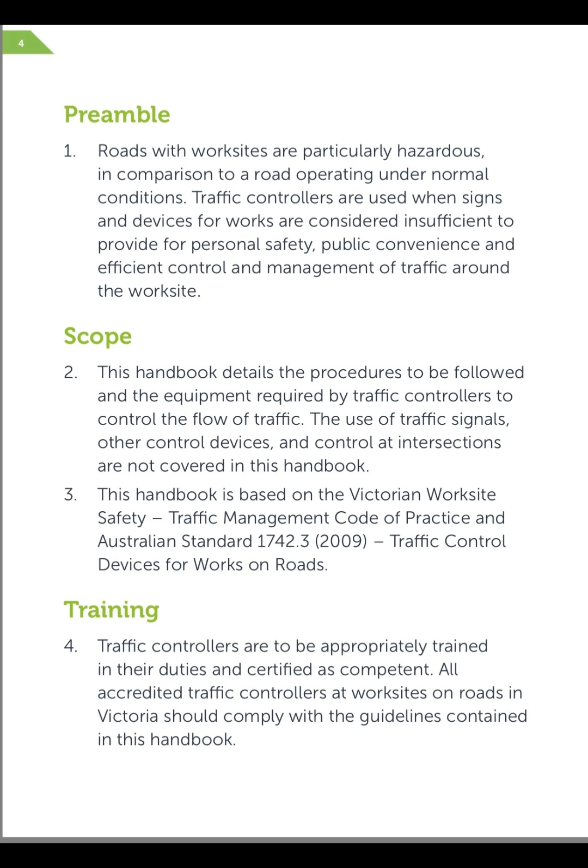Training. 4. Traffic controllers are to be appropriately trained in their duties and certified as competent. All accredited traffic controllers at work sites on roads in Victoria should comply with the guidelines contained in this handbook. 5. All traffic controllers are required to obtain a valid statement of attainment in traffic control using stop/slowbat and should attend an appropriate refresher course every 3 years.

Traffic Controllers Authority. 6. Accredited traffic controllers have the authority to: A. Legally stop or slow traffic using a stop/slowbat. B. Use hand signals to advise traffic in conjunction with the stop/slowbat. And C. Report to the supervisor motorists who fail to follow reasonable directions.

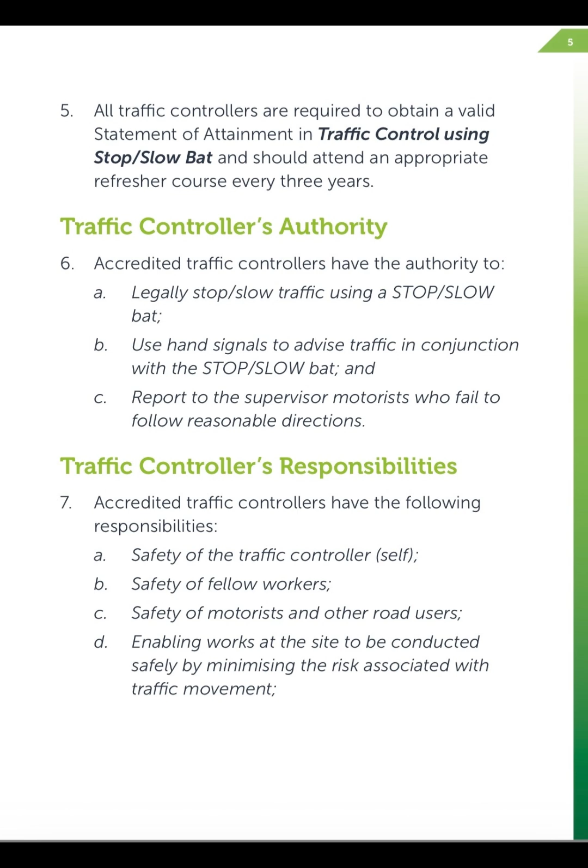Traffic controllers' responsibilities. 7. Accredited traffic controllers have the following responsibilities: A. Safety of the traffic controller self. B. Safety of fellow workers. C. Safety of motorists and other road users. D. Enabling works at the site to be conducted safely by minimizing the risk associated with traffic movement.

E. Controlling traffic in a professional manner to enable drivers to negotiate through, past, or around the worksite safely. F. Ensuring that indication given to the traffic is consistent with the display provided by the traffic signals. G. Maintaining traffic control in emergencies and other difficult situations. And H. Minimizing delays to traffic.

Application. 8. When required by the volume of traffic or the conditions at the worksite, the supervisor may arrange for traffic controllers to control the movement of traffic in the following situations: A. On bituminous surfacing works being carried out under traffic. B. Where one lane of a two-lane two-way road or bridge is closed unless traffic signal control is used. C. Where any of the conditions for the creation of worksite speed limits exist, but such speed limits are not being adhered to.

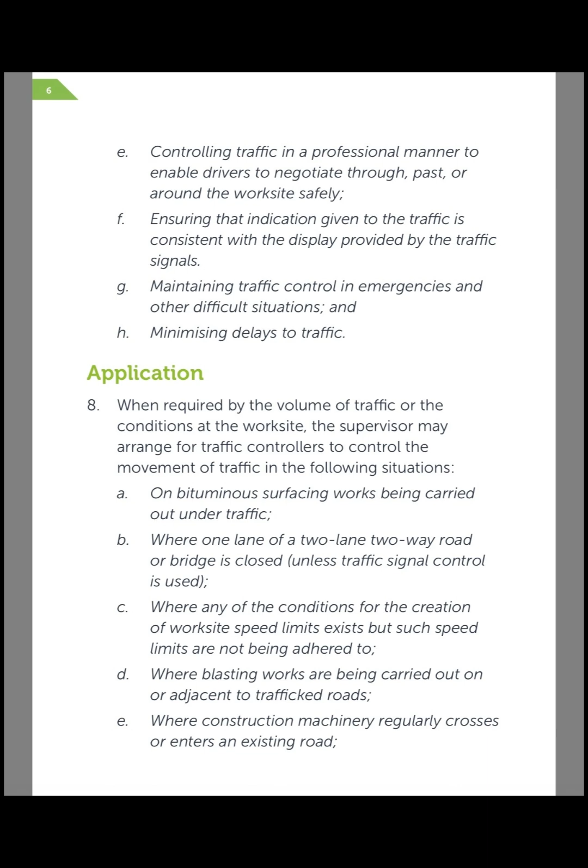D. Where blasting works are being carried out on or adjacent to trafficked roads. E. Where construction machinery regularly crosses or enters an existing road. F. Where sight distance to the worksite is limited. G. In emergencies. And H. Where signs and devices direct a motorist to disobey a law in any of the above circumstances.

9. When considering the volume of traffic, the following factors must be taken into account: A. Safety of the workers at the site. B. Safety of the public at the site. C. The duration of work. D. Site conditions and layout. And E. Personnel available. Dress. 10.

It is essential for safety that the traffic controller wears appropriate high visibility clothing at all times while on traffic controller duty. Such high visibility clothing is designed to make personnel more conspicuous and to warn road users of their presence. In daytime applications, a fluorescent red or orange high visibility garment complying with AS/NZS 4602 is required.

The garment should be correctly fastened at the front at all times and should be clean and in good condition. It should display information to identify the organization to which the controller belongs. A fluorescent red or orange cap or hat may also be worn, though it is not required.

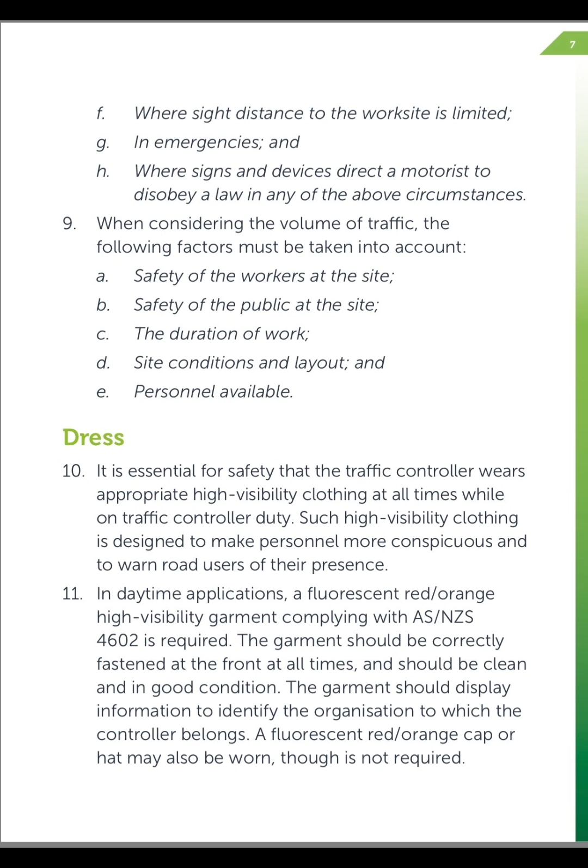Fluorescent material alone does not give adequate conspicuity for night use. A garment meeting or exceeding the requirement of AS/NZS 4602 for night use must be worn for night applications. High visibility garments are required to have an information tag which details whether they are suitable for day use, night use, or both day and night use.

Traffic controllers are advised to check the tag on their high visibility garment before use to ensure it is the correct type for the application. In wet conditions, the wearing of wet weather clothing should not obscure the high visibility garment requirements set out above. Safety footwear conforming to Australian standards should be worn at all times by traffic controllers.

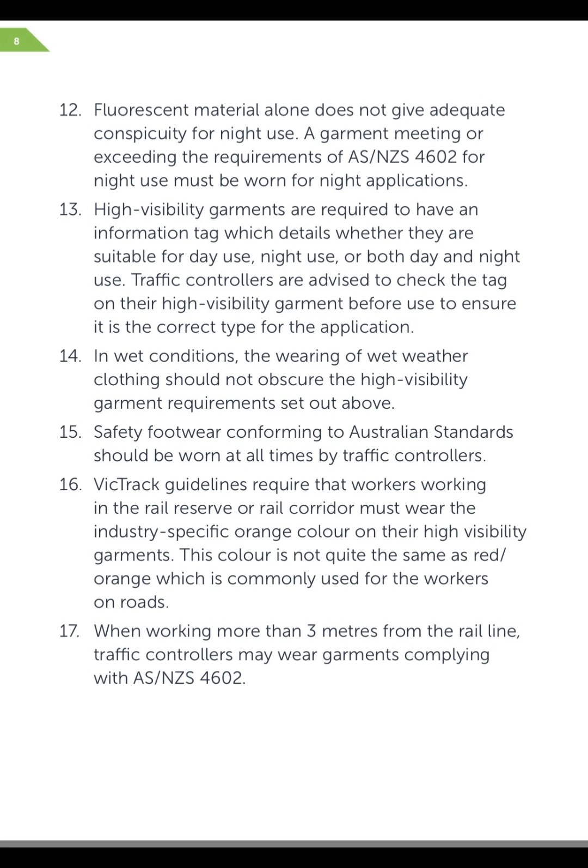VicTrack guidelines require that workers working the rail reserve or rail corridor must wear the industry-specific orange color on their high visibility garments. This color is not quite the same as red or orange, which is commonly used for workers on roads. When working more than 3 meters from a rail line, traffic controllers may wear garments complying with AS/NZS 4602.

Stop/slow bat. The stop/slow bat is a double-sided handheld sign with a stop banner, R6-8, on one side and a slow banner, T7-1, on the other. The banner size must be 450 or 600 millimeters in diameter.

The stop banner comprises a white Class 1 retroreflective legend and border with a red Class 1 retroreflective background. The slow banner has a black legend and border with a yellow Class 1 retroreflective background. The banner faces are shown below.

Traffic control bats should be clean and in good repair. Damaged or defaced banners or bats should be repaired or replaced promptly.

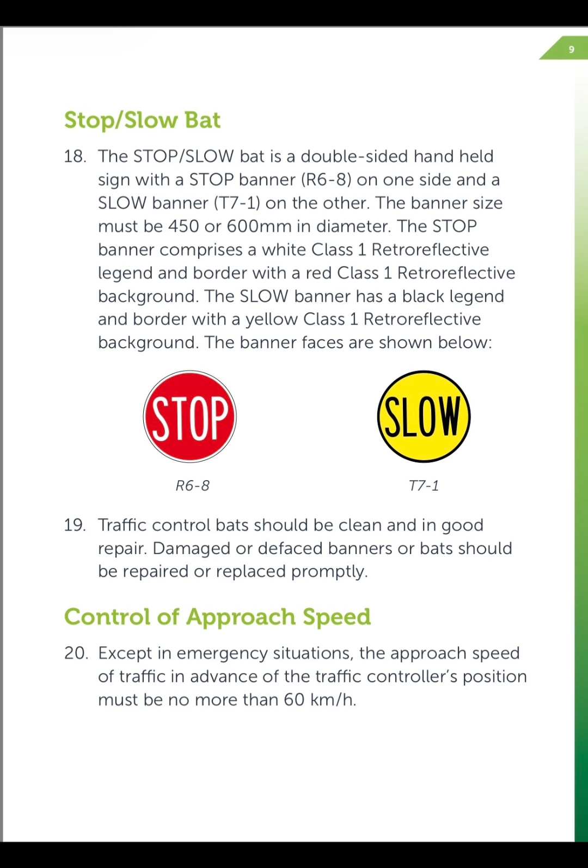Control of approach speed. Except in emergency situations, the approach speed of traffic in advance of the traffic controller's position must be no more than 60 kilometers per hour.

The law and the traffic controller. The traffic controller has no power at law. The legal authority does not rest with the person, but with the stop sign when it is displayed to drivers.

While engaged in construction or maintenance work and when operating a stop/slow bat, the traffic controller is empowered to stop vehicles by displaying a stop sign. The driver is required to stop the vehicle before reaching the sign and as near as practicable to the sign. The driver must not proceed beyond the sign while it is displayed in the driver's direction. The law in this regard only applies to the stop sign, which is regulatory in nature, and not to the slow sign, which is an advisory sign and only used for guidance.

Under Victorian law, traffic controllers have no authority to control or direct traffic by hand signals alone or by giving oral instructions to vehicle drivers. The control method is use of the stop sign. Hand signals by the traffic controller only enhance the use of the stop/slow bat.

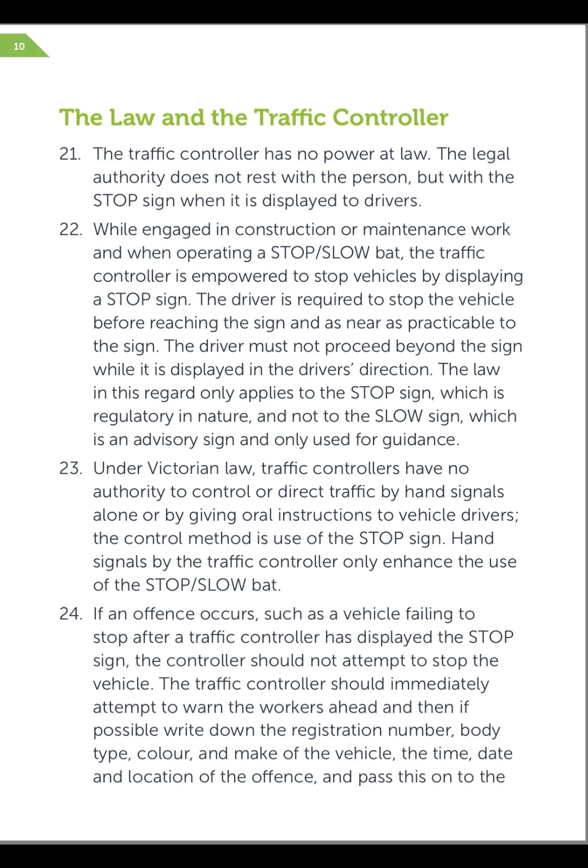If an offense occurs, such as a vehicle failing to stop after a traffic controller has displayed the stop sign, the controller should not attempt to stop the vehicle. The traffic controller should immediately attempt to warn the workers ahead, and then if possible write down the registration number, body type, color, and make of the vehicle, the time, date, and location of the offense, and pass this on to the supervisor. The supervisor is required to pass on the information without delay directly to the Victoria Police for processing.

A typical reporting form is available in this handbook and should be carried by traffic controllers during operations. Controlling traffic: there are 4 important conditions that must be in place prior to the traffic controller commencing work with the stop/slow bat. The maximum speed allowable for approaching traffic is 60 kilometers per hour.

The traffic controller must have an escape path and should be separated from the work site by 30 meters or more. The traffic controller must have a sight distance to approaching traffic of more than 1.5 times the approach speed, to enable adequate braking distance for slowing traffic. For example, if approach speeds are 80 kilometers per hour, the traffic controller should be able to see 120 meters along the road.

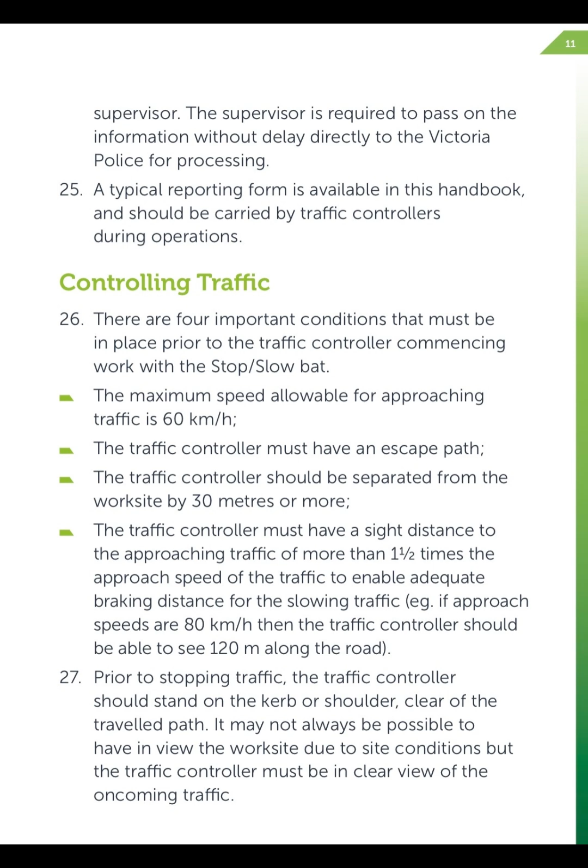Prior to stopping traffic, the traffic controller should stand on the curb or shoulder, clear of the travelled path. It may not always be possible to have the work site in view due to site conditions, but the traffic controller must be in clear view of the oncoming traffic.

To stop traffic, the traffic controller should watch for a suitable gap in the traffic. The stop bat should then be extended high over the carriageway at an angle of approximately 45 degrees, so that the stop banner is facing approaching traffic. After ensuring all traffic has stopped, and with the bat extended and stop banner clearly visible, the traffic controller may step onto the carriageway and walk confidently to a position in front of the driver, with the palm of the free hand indicating the stop gesture. Refer to Figure 1.

The traffic controller should maintain a vigilant watch of the traffic, but not take any posture that could be construed as intimidating or distracting. If the traffic controller has stopped a large vehicle and visibility to approaching traffic is obscured, the traffic controller should project the stop/slow bat out past the stationary vehicle for other drivers to see as they slow to a stop.

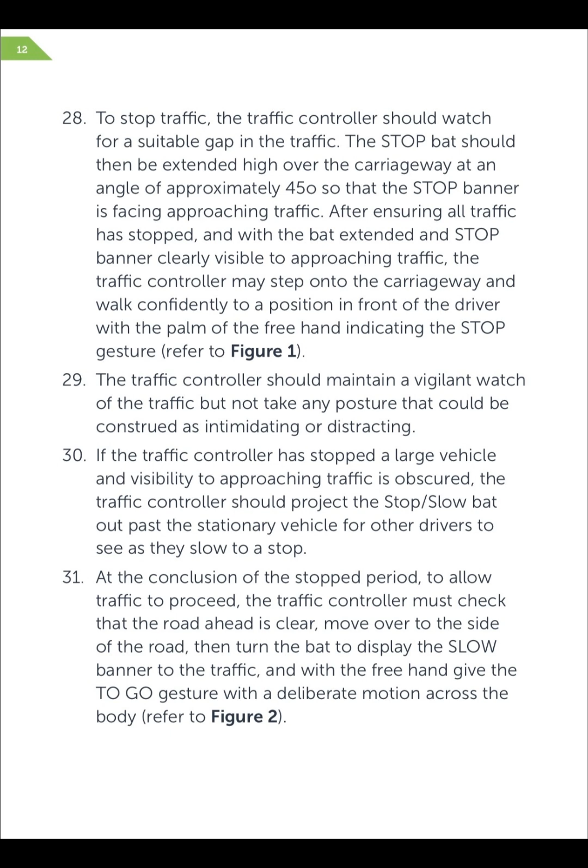At the conclusion of the stopped period, to allow traffic to proceed, the traffic controller must check that the road ahead is clear, move over to the side of the road, then turn the bat to display the slow banner to the traffic, and with the free hand give the go gesture with a deliberate motion across the body. Refer to Figure 2. Figure 1, stop. Figure 2, go.

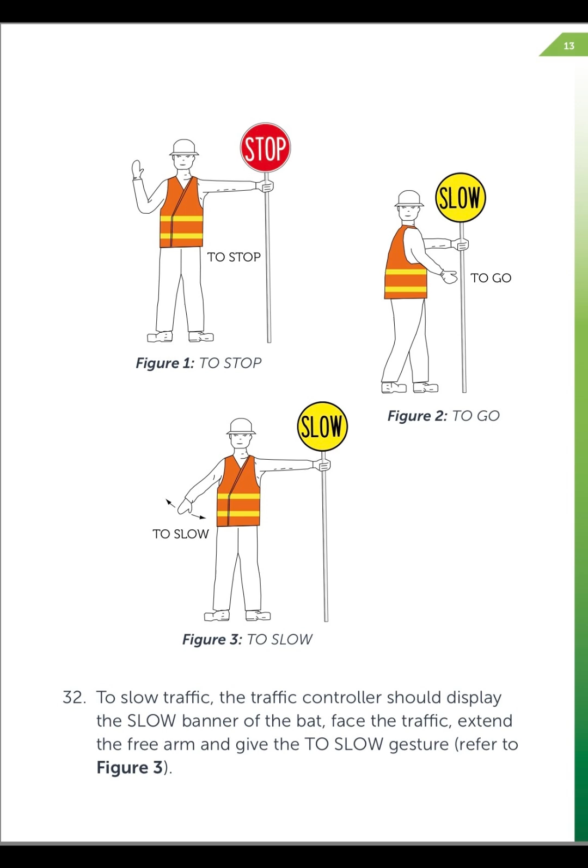Figure 3, slow. To slow traffic, the traffic controller should display the slow banner of the bat, face the traffic, extend the free arm, and give the slow gesture. Refer to Figure 3. When in use, the stop/slow bat should be held so that the sign is clearly visible to approaching traffic.

The key instructions to remember when controlling traffic are: A, be visible to the road user. B, do not stand on the carriageway until approaching traffic has stopped. C, do not turn your back to traffic. D, give clear instructions to road users. And E, always have a clear escape path.

Traffic controllers should be relieved from duty after not more than 2 hours for a period of rest or other duties of at least 15 minutes. Note: model instructions for the establishment of manual traffic control and for the training of a traffic controller are detailed in Appendix C of AS 1742.3-2009.

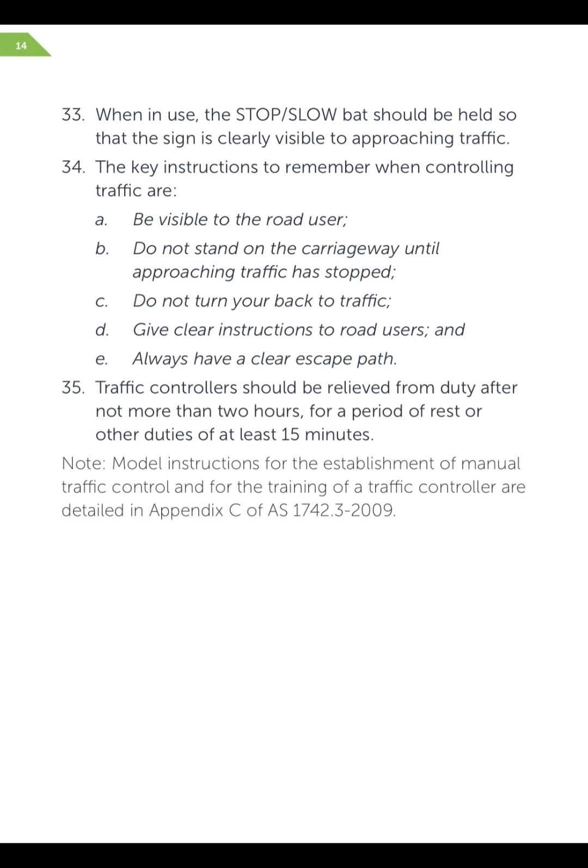Signs. Worksite signing must be placed in accordance with the Traffic Management Plan, which should comply with the Victorian Worksite Safety Traffic Management Code of Practice, and Australian Standard 1742.3-2009, Traffic Control Devices for Works on Roads.

The Traffic Controller Symbolic T1-34 sign and the Prepare to Stop T1-18 sign must be in place facing approaching traffic while traffic control is underway. Figure 4 on page 16 shows a format for a typical advance signing for a traffic controller. It is the responsibility of the traffic controller to ensure these signs are in place while controlling traffic and are removed immediately after traffic control has finished.

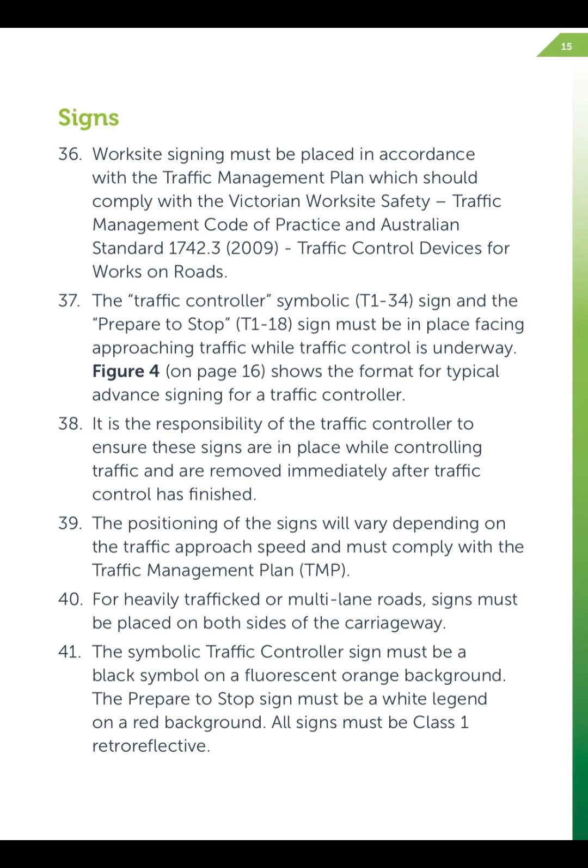The positioning of the signs will vary depending on the traffic approach speed and must comply with the Traffic Management Plan, TMP. For heavily trafficked or multi-lane roads, signs must be placed on both sides of the carriageway. The symbolic traffic controller sign must be a black symbol on a fluorescent orange background. The prepare to stop sign must be a white legend on a red background. All signs must be Class 1 retroreflective.

Figure 4, advance signing for traffic controller. This diagram shows the layout of advanced signing when a traffic controller is in place. The traffic controller is positioned with a minimum of 30 meters separation from the work area.

Further back, as per the traffic management plan, the prepare to stop sign and roadwork sign are displayed. Note, the traffic management plan (TMP) may require additional signs.

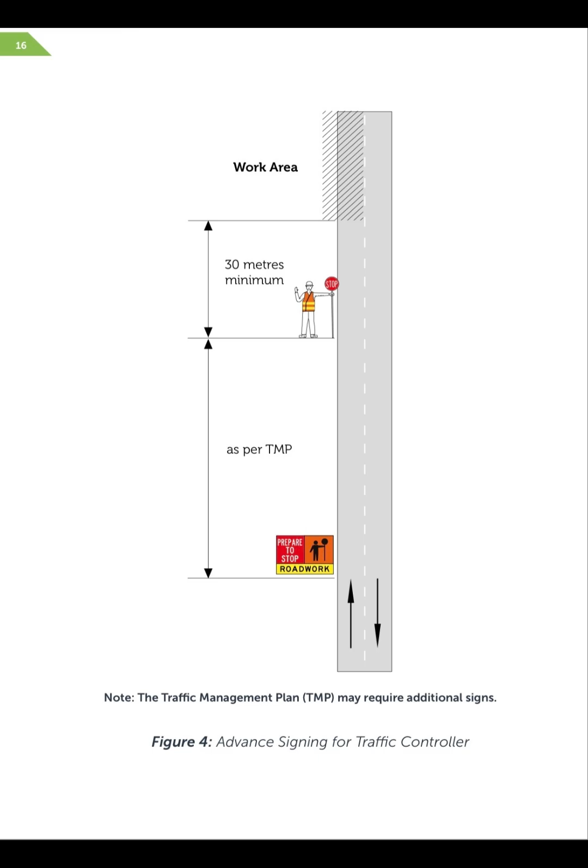Locating the traffic controller (42). The traffic controller should be positioned approximately 30 meters in advance of the work area. The distance should be sufficient to separate the controller from the works, but also allow the controller to converse with the workers regarding traffic flow requirements. If a vehicle proceeds beyond the stop sign, there should be some additional space for it to stop before the work area.

43. The traffic controller should stand facing the traffic from a position outside the travelled path, so that approaching traffic can see the controller from at least 1.5 times the approach speed of the traffic.

44. Where sight distance is limited and/or traffic volumes are high, it may be necessary to use a second controller in advance of the traffic control position to slow down or stop traffic approaching the end of the queue.

45. Where multiple traffic controllers are employed and they do not have line of sight to each other, radio contact or an intermediate communicator must be used.

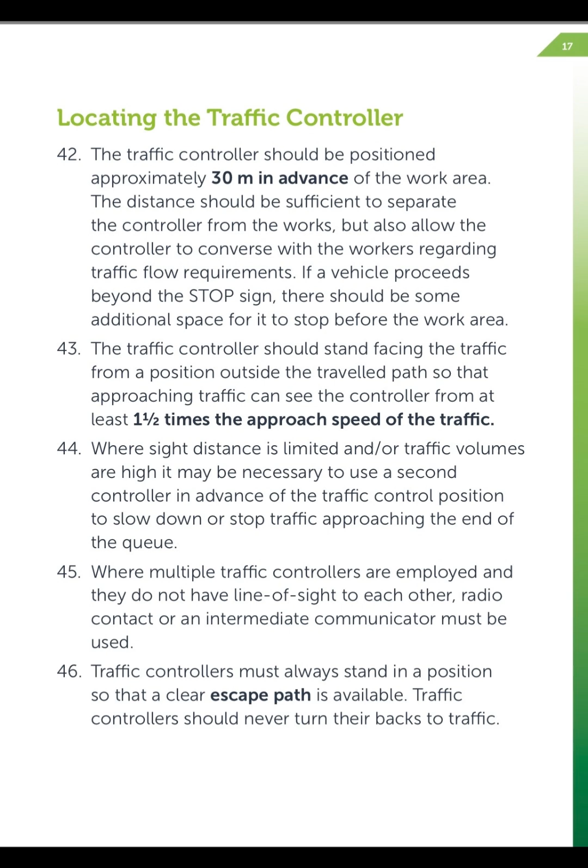46. Traffic controllers must always stand in a position so that a clear escape path is available. Traffic controllers should never turn their backs to traffic.

47. When traffic is stopped under a stop banner instruction, the traffic controller may change position so as to be clearly visible to traffic further along the approach road. The traffic controller should, however, always stay at the head of the traffic queue and not permit other persons to gather at his or her position. The traffic controller must be mindful to ensure a clear escape is available for any new position assumed.

48. The traffic controller should not obstruct road users' view of signs, nor should they be obscured by signs when viewed by approaching traffic.

49. The visibility of a traffic controller to motorists can be affected by the position of the sun, the background conditions including lighting, the location of the controller in shade or darkened areas, or by oncoming headlight illumination. These factors should be considered when positioning a traffic controller.

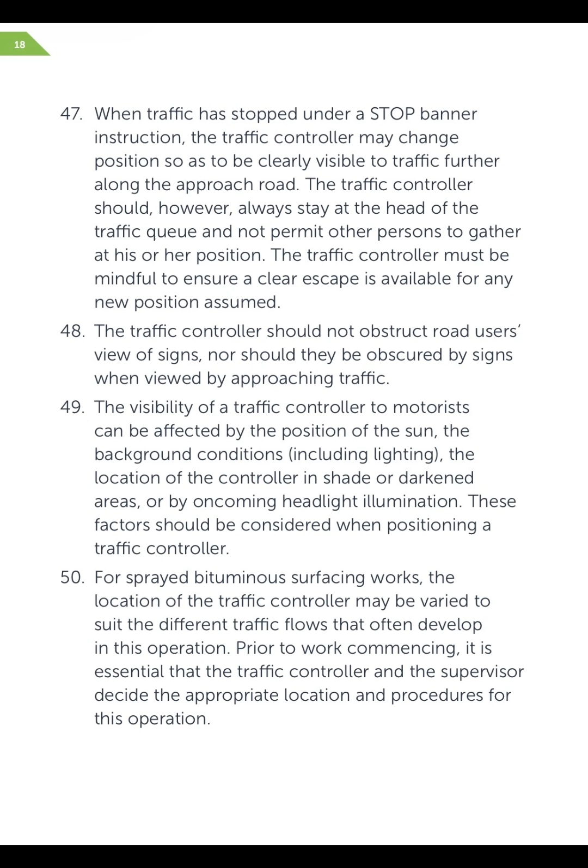50. For sprayed bituminous surfacing works, the location of the traffic controller may be varied to suit the different traffic flows that often develop in this operation. Prior to work commencing, it is essential that the traffic controller and the supervisor decide the appropriate location and procedures for this operation.

51. The following diagrams illustrate the use of one traffic controller and two traffic controllers under various traffic conditions. Figure 5A and 5B, using one traffic controller. The left diagram shows a situation with no approaching traffic: the traffic controller is holding the slow bat, and the instruction reads, 'Allow traffic in obstructed lane to proceed after checking travel path is clear.' The right diagram shows a situation where approaching traffic has right of way at all times: the traffic controller is holding the stop bat, and the instruction reads, 'Stop traffic in obstructed lane.'

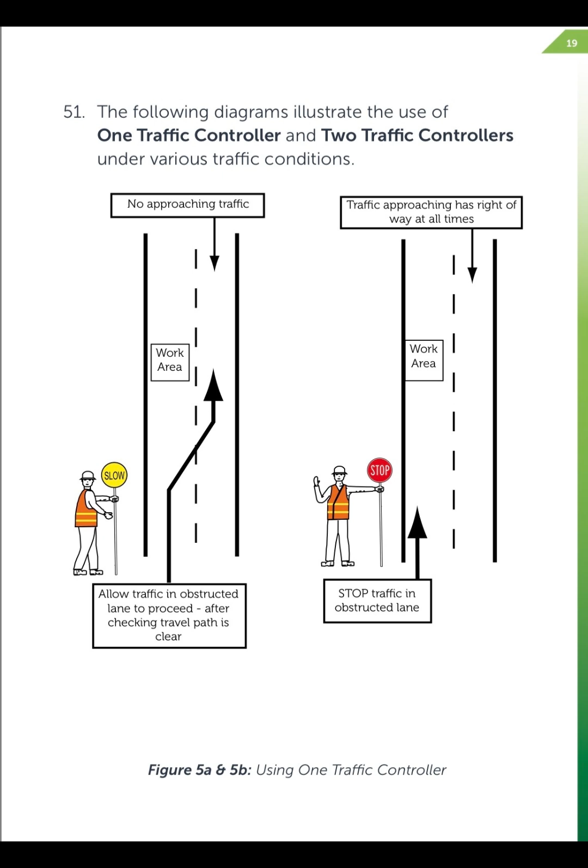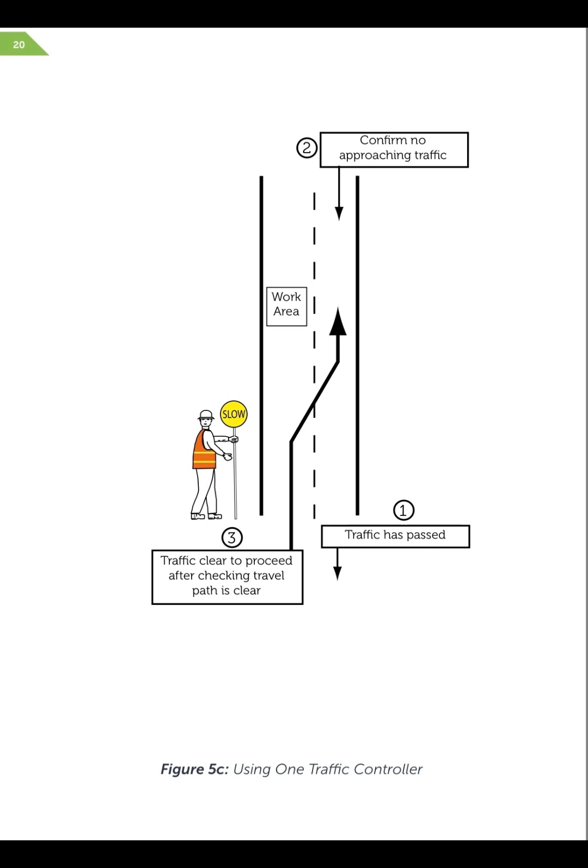Figure 5C, using one traffic controller. This diagram shows a step-by-step procedure when using one traffic controller. Step 1: Traffic has passed. Step 2: Confirm no approaching traffic. Step 3: Traffic clear to proceed after checking travel path is clear. The traffic controller is shown holding the slow bat on the left side of the road, next to the work area.

Figure 6A, using two traffic controllers. The controller displaying slow has control of the site. Make sure the other bat is on stop, and that the travel path is clear before allowing traffic to proceed.

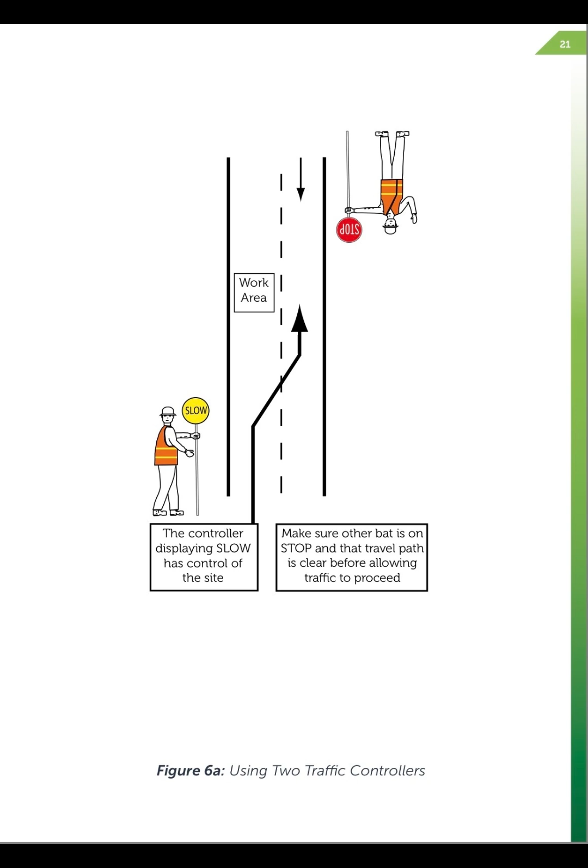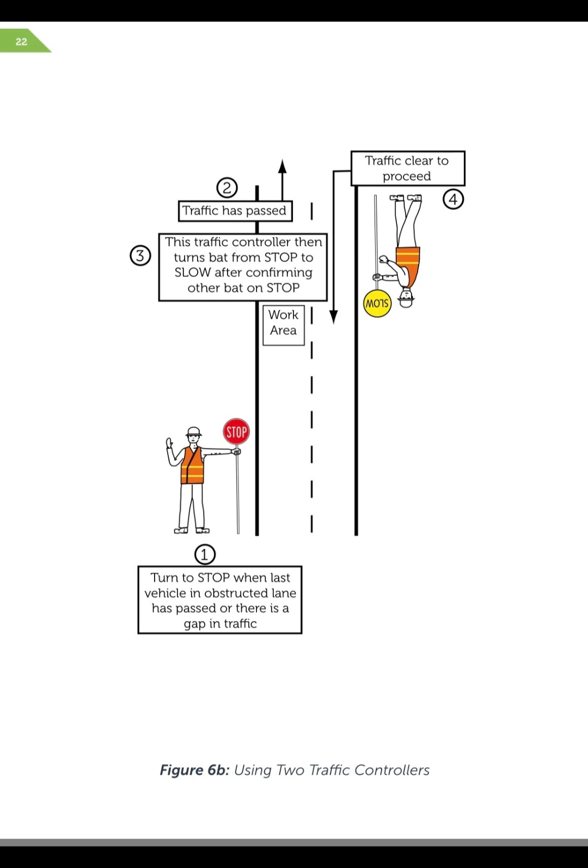Figure 6B, using two traffic controllers. 1. Turn to stop when the last vehicle in the obstructed lane has passed or there is a gap in traffic. 2. Traffic has passed. 3. This traffic controller then turns the bat from stop to slow after confirming the other bat is on stop. 4. Traffic clear to proceed.

Advance signing on curves and crests. 52. Sight and stopping distance are important near crests or curves where an approaching vehicle does not have adequate advance warning of the approaching works to safely stop at the end of the queue.

53. Traffic controllers should stand where they can see both ends of the work area and must be able to see approaching vehicles for a distance of at least 1.5 times the speed limit in meters.

For example, if the speed limit is 60 kilometers per hour, the traffic controller should be able to see at least 90 meters. If the sight distance is inadequate before approaching the work site, consideration should be given to lowering the speed limit, erecting additional advance warning signs, or using an additional traffic controller at the end of the queue.

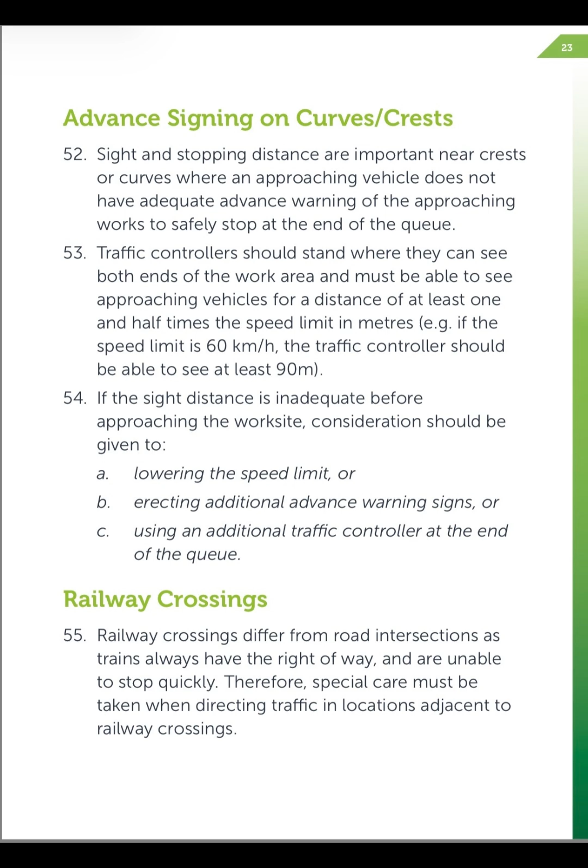Railway crossings differ from road intersections, as trains always have the right of way and are unable to stop quickly. Therefore, special care must be taken when directing traffic in locations adjacent to railway crossings.

Generally, drivers will follow direction from traffic controllers when they contradict other signals, signs, or control devices on the road. Special care must be taken at railway crossings to ensure that traffic is not directed through flashing railway crossing signals, that traffic queues do not extend across railway crossings, and that traffic is not directed through stop or give way signs requiring vehicles to stop or give way to approaching trains.

No work within 3 meters of a railway crossing may be undertaken without prior approval from the relevant rail authority, except in an emergency, in which case notification should be provided to the rail authority as early as reasonably practical. All works at rail crossings must be undertaken with a Railsafe Supervisor present to monitor and manage the rail crossing and rail movements.

Where a railway crossing exists within a section of road being controlled by a traffic controller, a flag person accredited by the relevant rail authority must be stationed at the traffic stop line of the railway crossing, or at least 3 meters from the nearest rail. The flag person must be equipped with a two-way radio to watch for trains and advise the other traffic controllers to stop traffic in time for train movements through the crossing. The flag person must also be an accredited traffic controller.

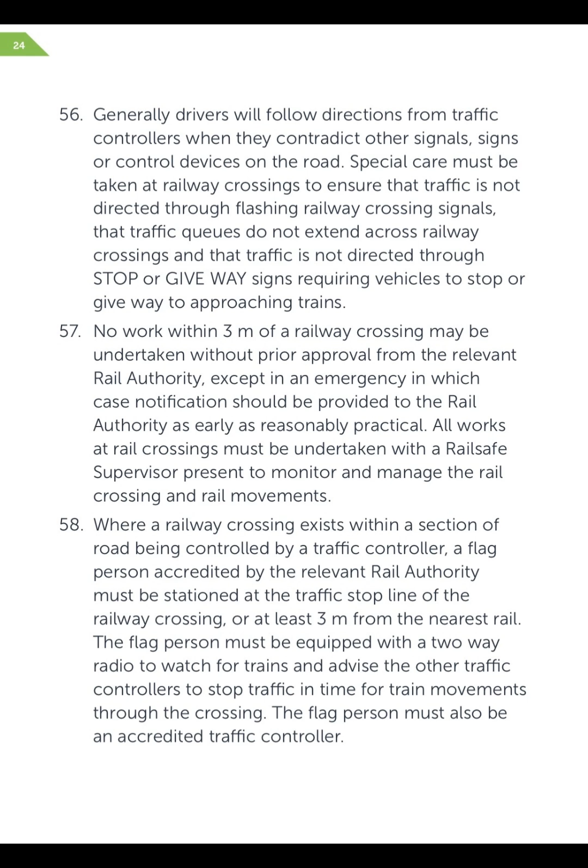Traffic controllers stationed at railway crossings are required to be equipped with a handheld stop/slow bat, which has the rear slow banner covered. This is to prevent vehicles approaching the railway crossing from the opposite direction from following the slow instruction and ignoring other signs or flashing signals.

Traffic controllers must ensure that stopped vehicles do not queue back over a railway crossing. If there is a chance of this happening, vehicles must be stopped on the approach to the railway crossing.

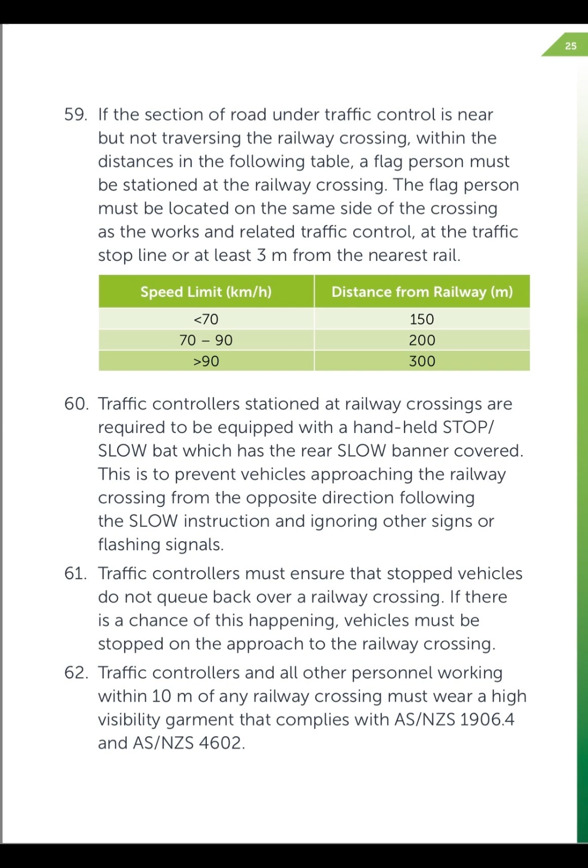Traffic controllers and all other personnel working within 10 meters of any railway crossing must wear a high visibility garment that complies with AS/NZS 1906.4 and AS/NZS 4602.

Only personnel who can reasonably deal with the traveling public should be selected as traffic controllers. They should have a sound temperament and not allow themselves to be provoked by members of the public. By exercising restraint, they will gain more respect.

Correct appearance, behavior, and attitude are essential so that motorists will recognize traffic controllers as a form of authority and will react accordingly. A disinterested controller with a slovenly appearance and manner will create a bad impression to the traveling public.

Traffic controllers must not attempt to control traffic while seated and should hold the traffic bat erect, not upside down, while giving hand signals. Traffic controllers must ensure that the signing on the approach to the job gives a timely and accurate warning of the situation facing drivers. If this is not the case, drivers may ignore the controller, putting themselves and workers at greater risk.

The traffic controller is required to be alert while acting in an official capacity, in addition to looking after their own safety and that of the road workers in a hazardous environment.

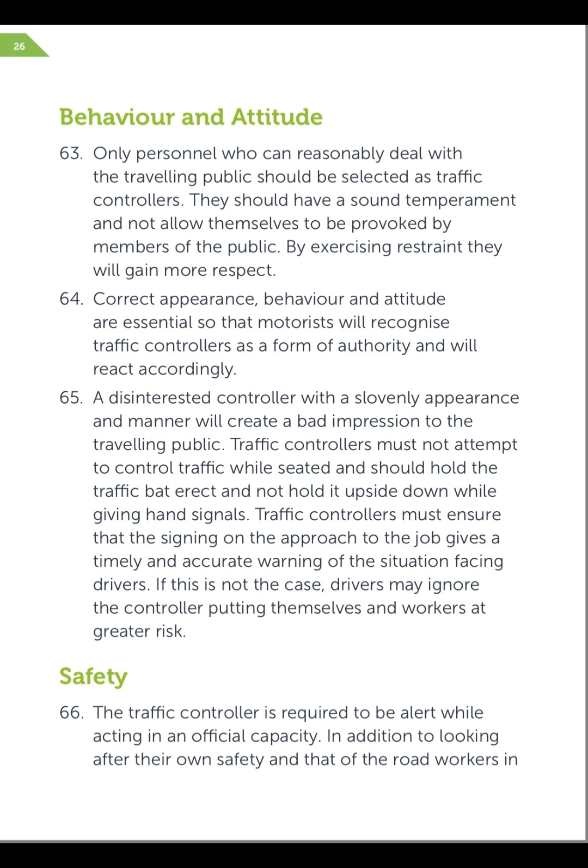Traffic controllers have the responsibility of ensuring the safety of the traveling public, including pedestrians through or around the works area. For these reasons, only competent persons should be appointed as traffic controllers.

A potential hazard confronting the traffic controller is a vehicle that fails to stop or fails to slow down. Interpretation of the slow sign means many things to different motorists, and traffic controllers should not assume that motorists will reduce their speed to a speed consistent with the level of safety desired at the worksite.

Caution should also be exercised when standing close to the path traveled by vehicles, as protruding loads can present a hazard, especially if part of the load on the vehicle has moved without the driver's knowledge.

The traffic controller should remain standing at all times while carrying out their duties. This ensures the traffic controller is not unduly restricted if there is a need for evasive action. Traffic controllers should be mindful to never turn their backs to traffic and to always maintain an escape path.

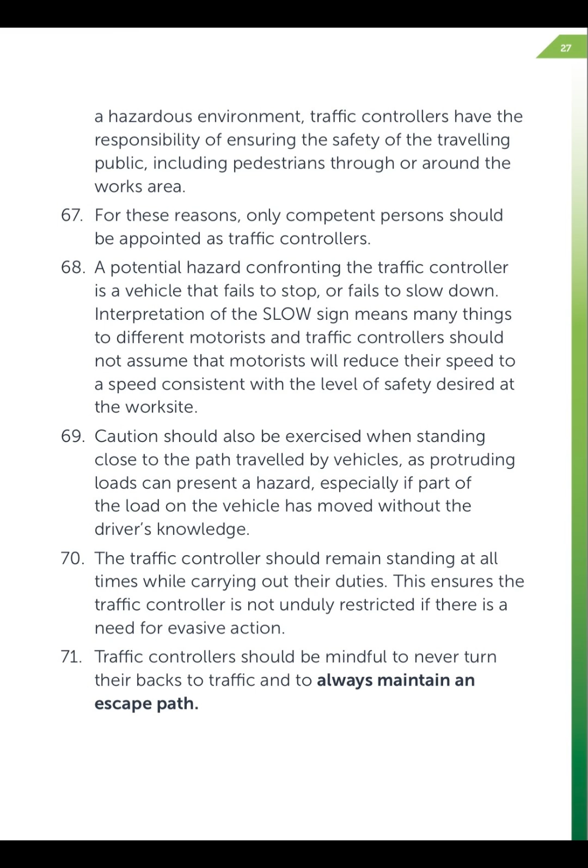Reduced visibility. Traffic controllers and supervisors should be aware of the dangers faced by road workers as a result of reduced visibility. Reduced visibility on roads can be caused by dust, heavy rain, fog, or smoke.

At 60 kilometers per hour, the stopping distance for an average car is 90 meters, assuming level road and reasonable pavement. In situations where visibility is reduced to less than these distances, additional care must be taken by traffic controllers to ensure the safety of themselves and road users.

Where supervisors have a degree of control over the cause of reduced visibility, such as site-generated dust or burn-off, appropriate steps should be taken to avoid the creation of a hazard, or to control the hazard to ensure the safety of road workers. Where there are factors outside the control of the supervisor, such as fog, heavy rain, or bushfires, the supervisor should review the need for the work to be started or continued until visibility conditions have improved.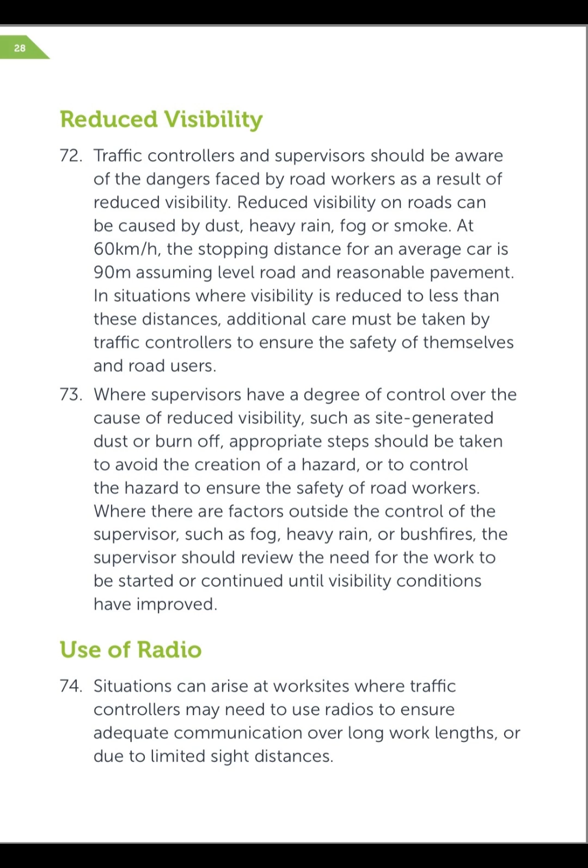Use of radio. Situations can arise at work sites where traffic controllers may need to use radios to ensure adequate communication over long work lengths, or due to limited sight distances.

If the work is to occur over a long period of time, the capacity of the battery in the radio should be carefully monitored. When using handheld radios, traffic controllers should ensure that the standard of hand signals in support of the stop/slow bat is not adversely affected.

A neck or shoulder strap attached to the radio should be used to maintain a free hand for signaling. It is not recommended to use two-way radios operating on CB, citizen band, frequencies, as interruptions or interference may be caused by other operators using the same frequency.

Supervisor's responsibility. Supervisory personnel on works requiring a traffic guidance scheme should ensure that signs and devices do not direct the traveling public to disobey a law unless a traffic controller is present to direct traffic.

Supervisors should ensure that traffic controllers are courteous to the traveling public. They should also ensure that the personnel assigned to place, maintain, and remove signs and devices are aware of their responsibilities, and that traffic controllers are informed of their duties.

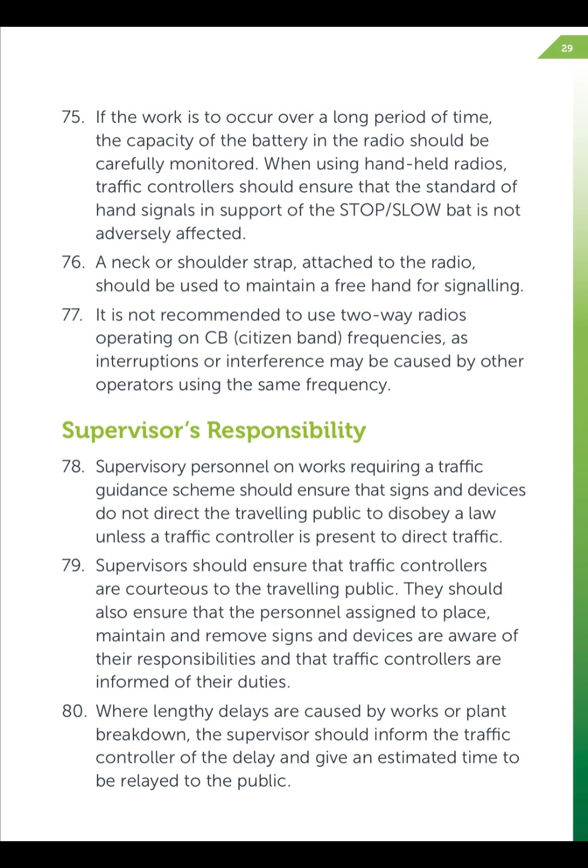Where lengthy delays are caused by works or plant breakdown, the supervisor should inform the traffic controller of the delay and give an estimated time to be relayed to the public.

Controlling traffic at night. Under dry conditions, traffic controllers ought to wear a day or night high visibility garment conforming to the specifications of AS/NZS 4602. Where additional conspicuity is required, white combination overalls fitted with silver retroreflective material should be worn.

In wet conditions, wet weather clothing should not obscure the high visibility garment required above to ensure conspicuity of the traffic controller. Methods of the use of a luminous wand for nighttime traffic control are shown in Figure 7: use of luminous wand for nighttime traffic control.

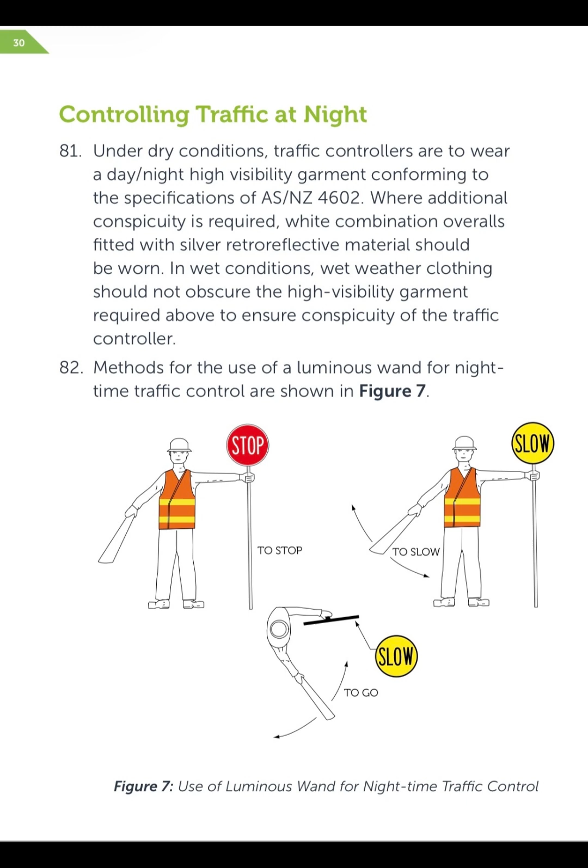Response to crashes at the worksite. In the event of a crash occurring at the worksite, the traffic controller's primary responsibility is to maintain control of the traffic for protection of the workers and the public.

Assistance to those involved should be provided, while steps are taken to notify appropriate emergency authorities, such as police, ambulance, and fire brigade. Names and addresses of witnesses should be obtained when it is safe to do so. Traffic control in emergency situations.

85. In situations where works are due to an emergency, that is, the works are required due to risks to public health and safety, the worksite initial setup should be in accordance with a generic traffic management plan (TMP) or safe operating procedure (SOP), as best meets the requirements of the situation.

86. During initial setup, some signs, including advanced signs or speed reduction signs, may not be possible to deploy due to the emergency situation. If the emergency situation continues and traffic control operates more than 2 hours, then all advanced signs and devices must be in place.

87. The supervisor responsible for traffic management at the emergency or incident location must notify the relevant road authority as soon as possible.

Conclusion. 88. Adherence to the procedures outlined in this handbook should ensure safe and efficient control of traffic by traffic controllers using the stop/slow bat. The aim and responsibility of the traffic controller is to ensure the safety of all workers and road users while allowing works to proceed, and at the same time minimizing delays to traffic.

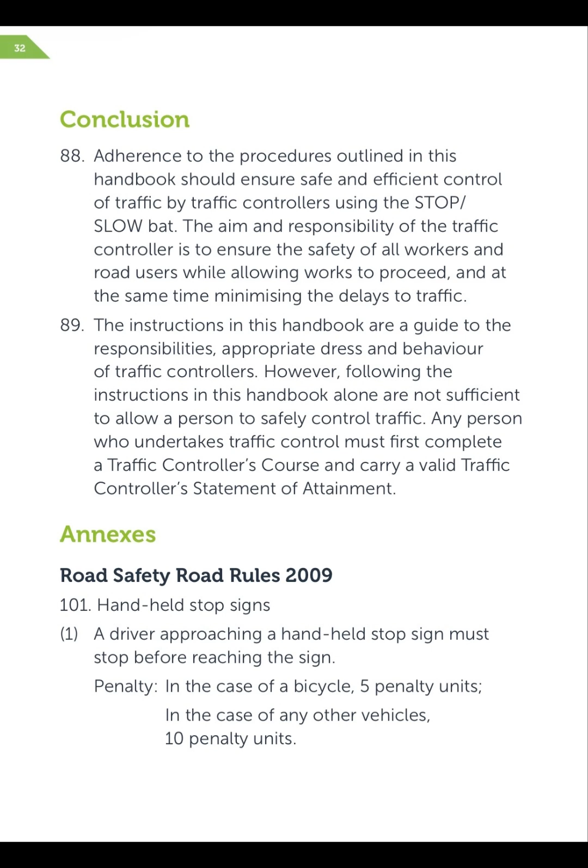Penalty: in the case of a bicycle, 5 penalty units. In the case of any other vehicle, 10 penalty units.

2. The driver must not proceed until the holder of the sign (A) no longer displays the sign towards the driver, or (B) otherwise indicates that the driver may proceed.

Penalty: in the case of a bicycle, 5 penalty units. In the case of any other vehicle, 10 penalty units.

3. This rule does not apply to a driver approaching or at a handheld stop sign at a children's crossing. Note: Rule 80 defines children's crossing and deals with handheld stop signs at children's crossings.

Summary of traffic controller instructions. Stand on the curb or road shoulder with a clear view of the approaching traffic and, if possible, a view of the worksite. Wait for a suitable break in traffic before attempting to stop vehicles.

When a suitable break is found, extend the bat across the carriageway at an angle of 45 degrees, with the stop banner facing the approaching traffic, as well as using the stop hand signal.

When approaching traffic is stopped, and if required, move from the curb or road shoulder to the center of the carriageway with the bat still extended at 45 degrees.

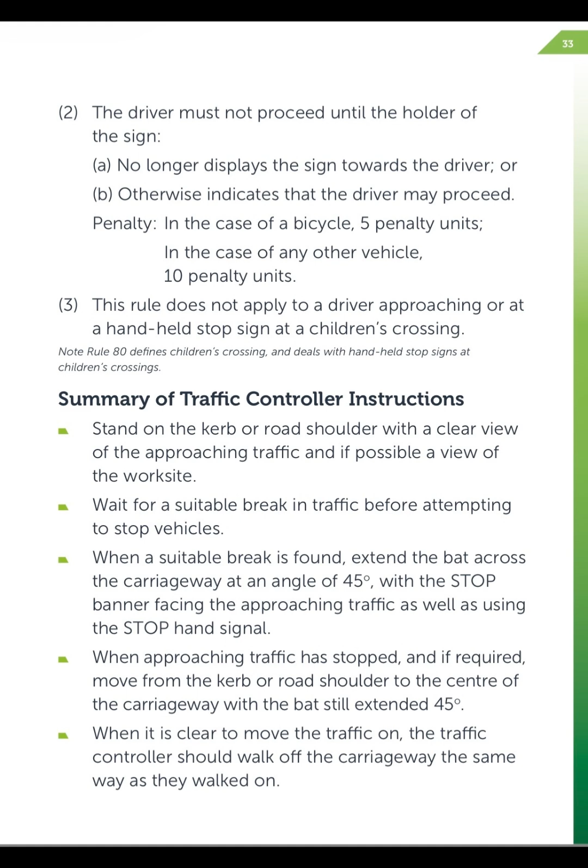When it is clear to move the traffic on, the traffic controller should walk off the carriageway the same way as they walked on. When safely back on the curb or road shoulder, turn the bat so that the slow banner is facing the vehicle queue and indicate to the first driver to proceed using the 'go' motion hand signal.

Key points. At all times, the traffic controller should: A. Be more than 30 meters from the worksite. B. Be visible to the road user. C. Not move onto the carriageway until approaching traffic is stopped. D. Not turn their back to traffic. E. Give clear instructions to road users. And F. Always have a clear escape path.

Traffic controller restrictions. The traffic controller must not: A. Work where approach speeds of traffic are more than 60 kilometers per hour. B. Give hand signals without the stop/slow bat. C. Give oral instructions to motorists. D. Demand motorist names and addresses. E. Direct motorists through red traffic lights.

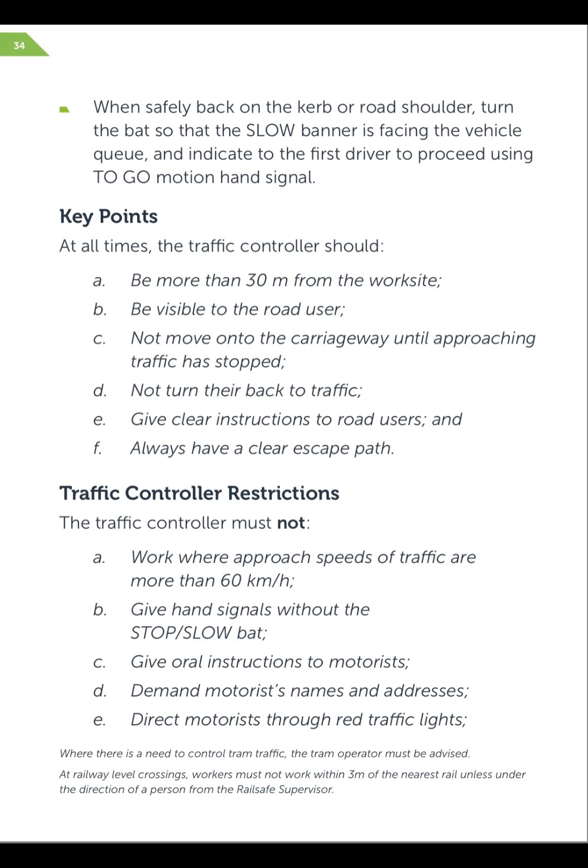Where there's a need to control tram traffic, the tram operator must be advised. At railway level crossings, workers must not work within 3 meters of the nearest rail unless under the direction of a person from the railsafe supervisor.